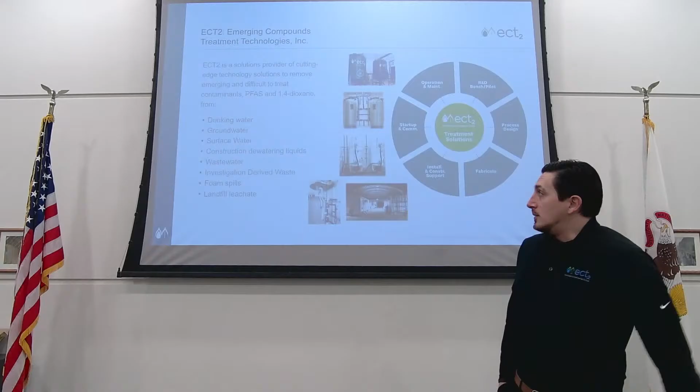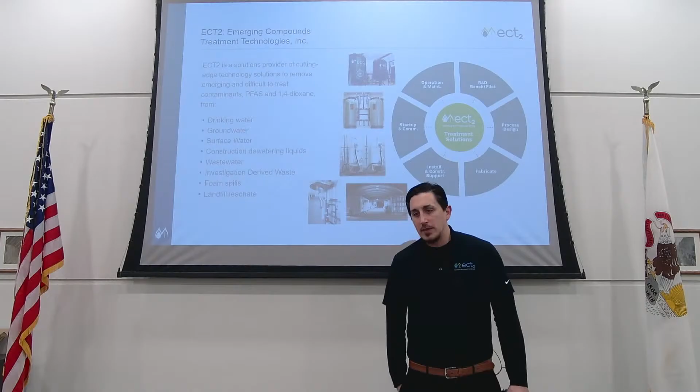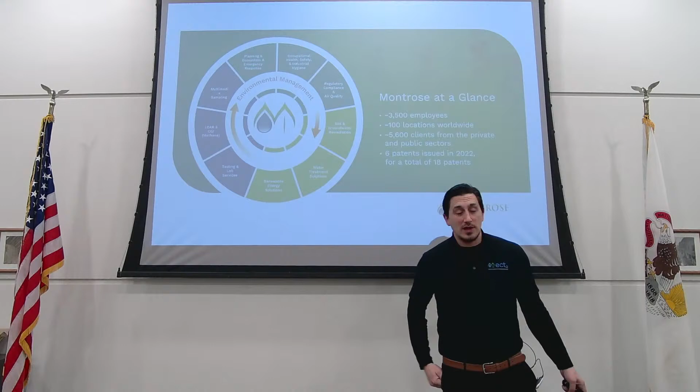A bit further on about us, we are also owned by Montrose Environmental Group. They own 86 verticals of different environmental-based companies, air, water, and soil. We're certainly the water component of that, and specifically, 95% of each day we're working on PFAS. Other verticals include Enthalpy Analytical. I mention that because turnaround times on PFAS analytical is getting longer, right? So this gives us an opportunity to work directly with colleagues. We get preferred pricing in 2 to 3 week turnaround times. So as we're developing projects, doing bench tests, evaluating technologies, we can get to the end quicker with data at a rapid rate.

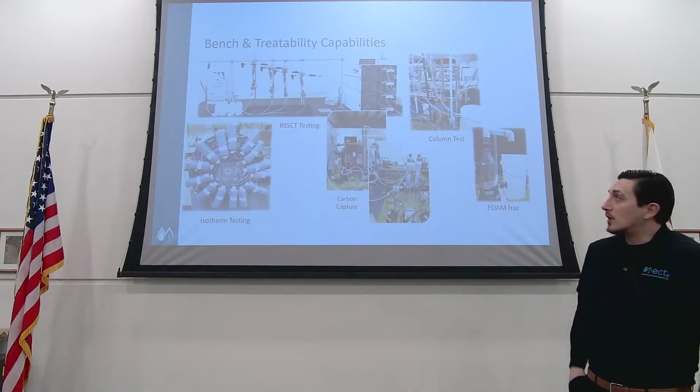So leaning into that, in Fuquay, North Carolina, we have a treatability lab where, you know, it might be a conversation of, is it GAC, is it ion exchange? Well, let's figure it out from the least cost intensive perspective first, and that would be a number of different ways we can analyze this just on the bench at our lab. Our RSSCT testing is rapid small scale column testing. So what we do is we crush these ion exchange beads and we get breakthroughs in days as opposed to months or even years.

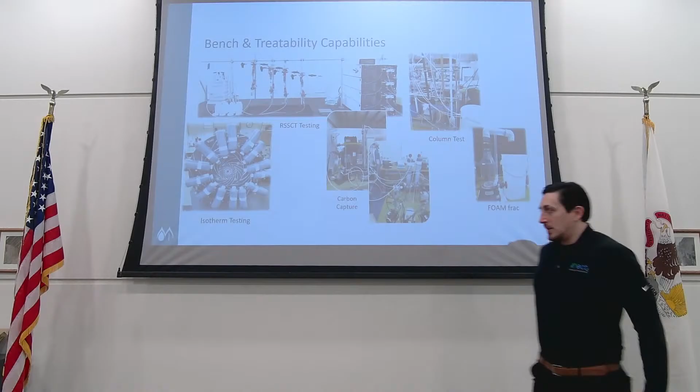With PFAS being minimal, if we're trying to get to 4 parts per trillion and we're at 8, it might take a few years to run columns and get breakthrough. This helps us expedite that process, beginning with the end in mind. Isotherm is basically a yes-no test: will the media work? If so, then we can proceed.

All this we kind of create stepwise just to give you an idea of what it looks like to really analyze this. Next phase, taking it from the bench to the pilot. Certain cities are going to want to see the demonstration of the technology at their site with their real-time water. It's great to get a grab sample, send it, test it, get some numbers, but to make it more real, this is our next phase.

Column tests up there would be a couple different carbons, couple different resins, the ability to take an honest look at if it works, which one might work better. All the way down to mobilized systems here in 40-foot containers that can run 365 anywhere in the world.

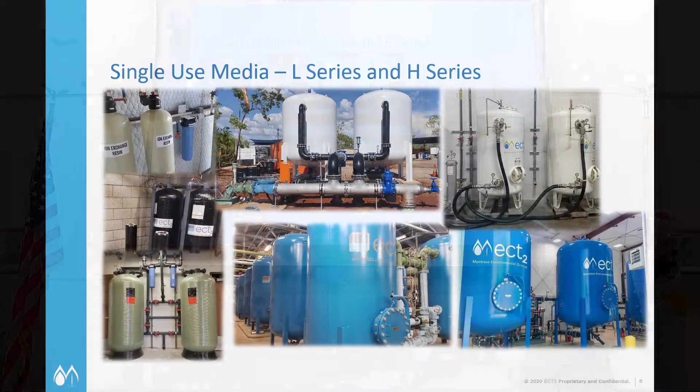Then just a quicker look here. We've got a couple different sizes basically, running from under-your-sink cartridges to 8 GPM. For all intents and purposes, you're looking at softening vessels there, 8-inch diameter, 54-inch height. These are all going to go up all the way to what you're seeing here, our 12-foot diameter pressurized steel vessels rated for 125.

We've got newer versions that are shorter, and I'm going to get into the reason why that is, but carbon, resin, pressure vessel flow through. We're designing it with specific contact times specific to the media, and I'll touch on that a bit more as well.

Rapid response equipment, if you've got a spill as mentioned, or a groundwater site we need to treat, we can certainly deploy these independent skids. It just makes it a lot easier to set up a system without building a building around it. This helps us get to work really quickly.

So just a quick outline, I'm going to touch on a couple different treatment technologies here, and from a few different application points. Whereas PFAS, it's everywhere, so how do we get it out of drinking water? How do we get it out of these passive receiving waters, out of their effluents? We're going to get into that.

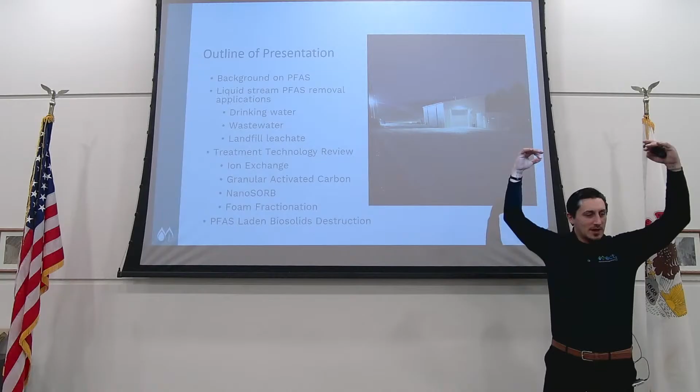Cool, quick story. That was all you see is dirt. To the left is Champ Landfill in Maryland Heights, and it's actually an old quarry, so it's the opposite, where it's not a hill building up this way, they're bringing all their trash down into this quarry, and it's a Waste Connections site. We're very fortunate to be treating their leachate for PFAS. So this building we built from the ground up, put a PFAS treatment system in and built around it. I took that earlier this week.

No snow there. So I didn't want to assume we all knew everything about PFAS, so I'm just going to touch on it briefly.

Why? Because in large part they exist more places than not. We made the most of those two, we use the most of those two. So by nature it persists, and as a result we see a lot of it. So I think we all know most of this.

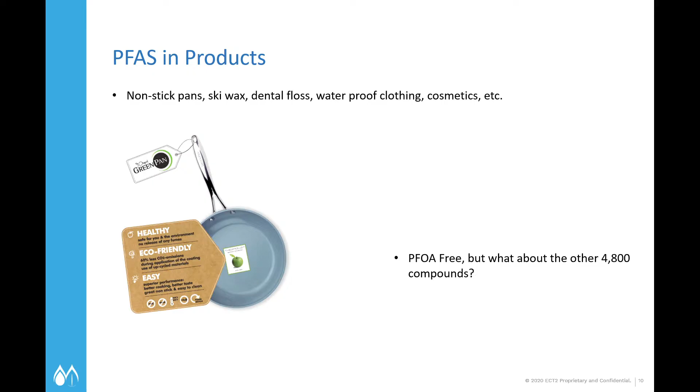I'm not going to beat us on it, but where does it come from? Scotchgard, Teflon, anything that's making - even probably this shirt being like Gore-Tex has probably got some PFAS in it. Cosmetics, packaging from fast food - it's everywhere. Carpet. So as a result, it ends up everywhere. A lot of it, as mentioned, ends up in the passive receivers, the landfills, and the wastewater treatment plants, just as a direct result of it being in convenient products.

So just a really quick touch on the chemistry. I've mentioned this, but it's important to understand why. The hydrophobic tail absorbs into things extremely well. That hydrophilic head, right, the bottom, this part here, that's a carboxylic acid group. The top is a sulfonate group. I mention this because those heads have a charge to them, so they're negatively charged. We take advantage of that charge on that molecule no matter what technology we're utilizing.

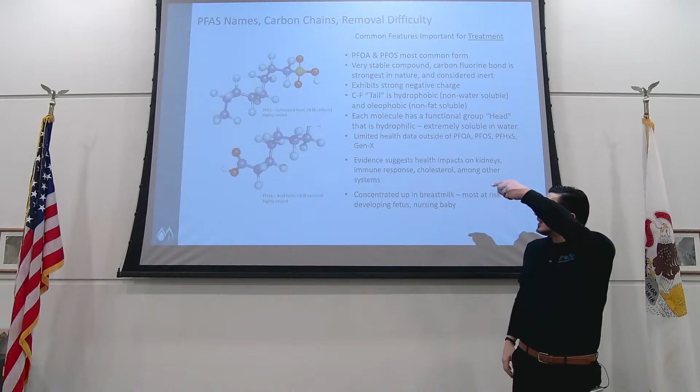So this one here, sulfonates, a bit easier to remove, but that's what you're seeing in AFFF, PFOS. PFOA is a direct result in your Teflon. So if you look at the Ohio River Valley, all the water there, we've probably seen dark waters. I would recommend it if you haven't, but that's Teflon. So it's really specific to certain areas.

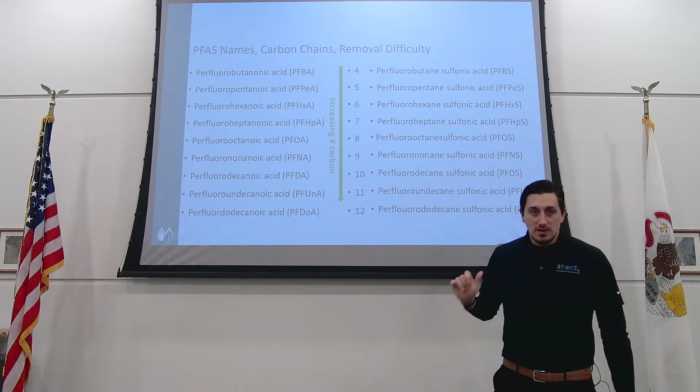So PFBA is a big one you're going to hear about. Right here in Cordova, Illinois, 3M is manufacturing it, utilizing it every single day. And the result of that is their groundwater is contaminated and their stormwater is contaminated as well. So I'm happy to say that ECT2 has the largest treatment system in the world in Cordova, along with a few others, Cottage Grove and Decatur, Alabama. We're doing a very good thing there with a great effort by that company. That's removing all of these high concentrations from 3 different flows, combining them, and then treating that PFAS to a non-detectable level. So when we're targeting PFBA, it's a real challenge. And I'm excited to show you what technology we're using to get there.

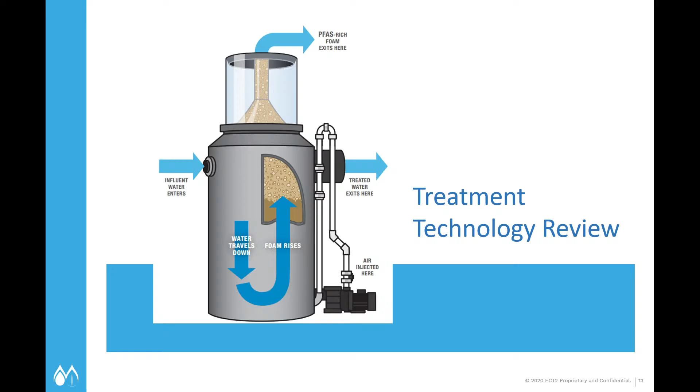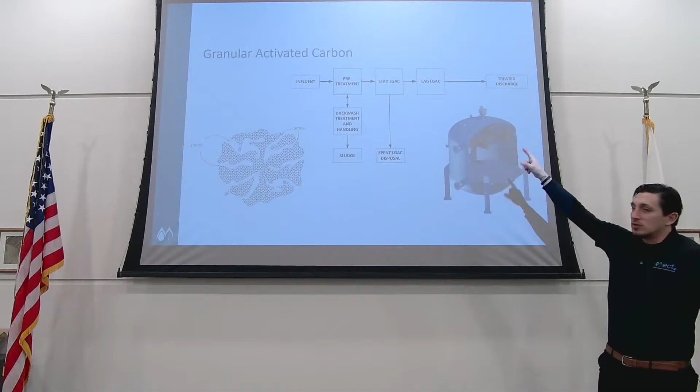You're looking at a pretty standard flow through diagram here, lead lag design with pressure vessels. Some points about carbon that I'll make: it typically, for drinking water, we're looking at 10 to 20 minutes contact time through your vessels. That in comparison to the next technology, you're going to see more vessels, more media. Some of its positives are its ability to remove co-contaminants all at once.

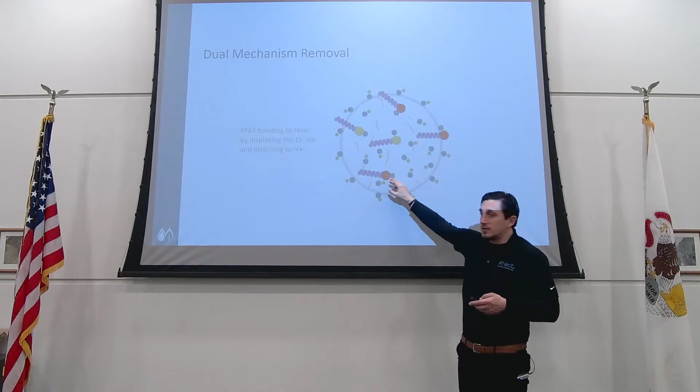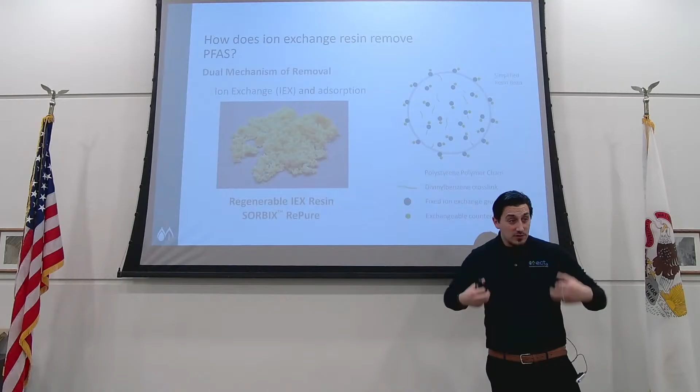You know, I used to think water came through and would flow around it and attach to it, but there's all these cross sites that the PFAS want to attach to because of that ability to exchange ions. So it's going to kick off chloride on this exchange site and attach that negatively charged group head of the PFAS onto the ion exchange. Now the difference here is you're going to have the ability to essentially hold this. It's like a chelation, so it's like a pincer. It wants to grab it like a lock and key. Once it's in, it takes extreme oxidative conditions, temperatures to get the PFAS to come off of the resin. That's a win. Now we've separated it and concentrated it onto a solids media. For most, that's good enough.

So I've touched on this. Here's your PFOS, that's your sulfonic group head. It's on the resin. We've done a great thing there.

The next phase, as I mentioned in Cordova, was more of a call to action: we need to put a patent around something that didn't exist before, which was the ability to regenerate those beads.

Up until this point, we've been talking about single-use medias. Use GAC, once it's exhausted, take it out, dispose of it via landfill, incineration, or other methods. Bring new GAC in, run it to exhaustion, repeat the cycle.

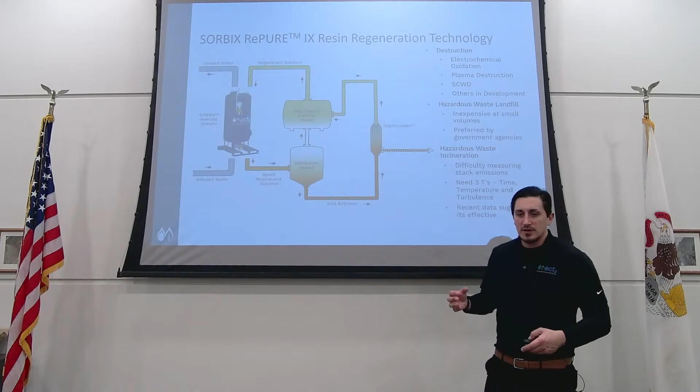It's really the same with single-use ion exchange. The positives to using resin are, now you're down to 2 minutes contact time for drinking water, so we've significantly decreased the need for capital equipment and media bed depths. We've got less media, less equipment, 4 times more removal in terms of total throughput, and more effective removal.

Again, that's the concept of selectivity. These functional groups want PFBS, want these shorter chains. Carbon has the ability to grab things in the order in which they exist, and typically, in large part, the sizes of the compounds surrounding it.

So hitting it with regenerable media, very simple process flow diagram: influent water coming in, counterflow through the bottom, treated water out. We're going to run these vessels basically as single-use ion exchange for 99% of their lives. Upon exhaustion...

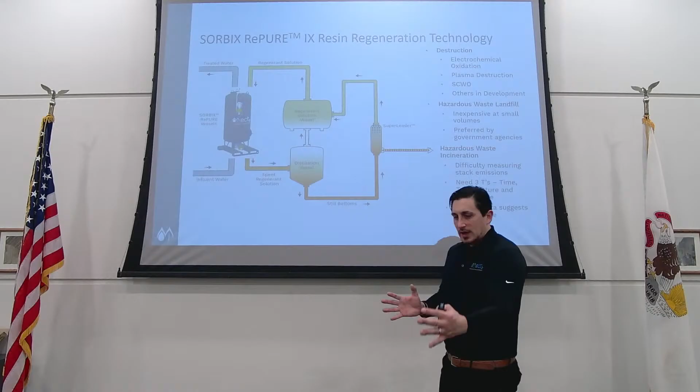There's two approaches we can take here. In the case of the mentioned site in Cordova, because it's upwards of 10,000 gallons per minute, the economics drove us to put a regeneration facility on site. It's a bolted-on building, separate from all the other equipment, and there, because of the levels, we're regenerating weekly. In the instance of drinking water, with low concentrations, we're not regenerating but every couple of years.

That's an instance where I would offer regeneration as a service. You buy all your equipment and all your media. Once it's exhausted, I'll come in, take out the media, bring it to a centralized regeneration facility that's owned and operated by us. We'll regenerate your media and return it.

All drinking water approved, certainly good for treating industrial waters, wastewaters, etc. So here we look for high volumes typically, or really high concentrations of PFAS, and the economics really start to drive favoring this technology.

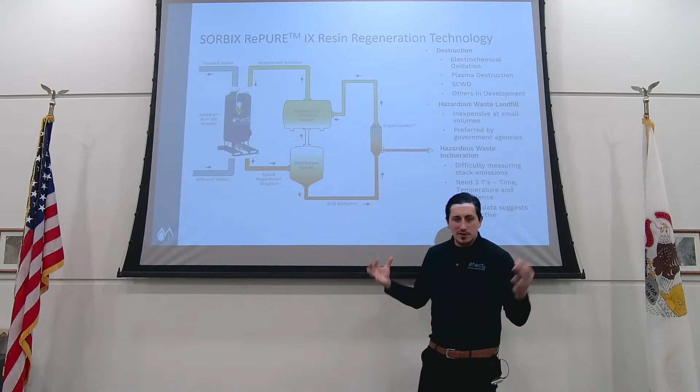You're going to ask, so I'll answer it: what happens when you regenerate it? What about the reject volume? The regeneration process is a two-step process. The first is a solvent-based chemistry that strips the PFAS and any other contaminants off of the resin.

So step one. Step two is adding sodium chloride brine concentration back onto the resin. What that's going to do is take the Cl part of the brine and put it right back onto those empty functional sites on that resin bead, and we can play that over and over again.

These resin beads are robust. They're divinylbenzene polystyrene, macroporous, made to be used over and over again. The equivalent prior existence that still happens in a lot of these resins is they're used as condensate polishers at power plants—condensate polishing resin is almost like a filter, taking all sorts of impact.

So my point is, in the mentioned 2018 site, we've regenerated there over 300 times, still getting 97% capacity back on the bead. So we can continue to use this thing over and over and over again.

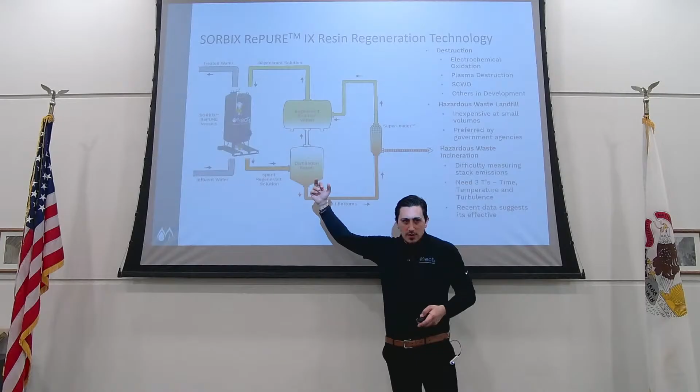So after we've got our media set, we've still got a waste stream to deal with. Distillation is going to recover the solvent, so we're reusing that solvent-based chemistry over and over again, really keeping that cost low. Now we've got still bottoms—that's high TDS, a bunch of salt, a bunch of PFAS in here. What am I going to do with that?

Two options. One we call super loading. Picture 39 trains in series of ion exchange vessels to handle 10,000 GPM. It's a lot, but what we're left with is a one-million-to-one concentration factor on a small volume of very high concentrated PFAS that we load up onto two 3-foot diameter vessels as a single-use approach.

So at the end of this, we've got a much smaller solids management of roughly 54 cubic feet that we'd be changing out on an event of a regeneration.

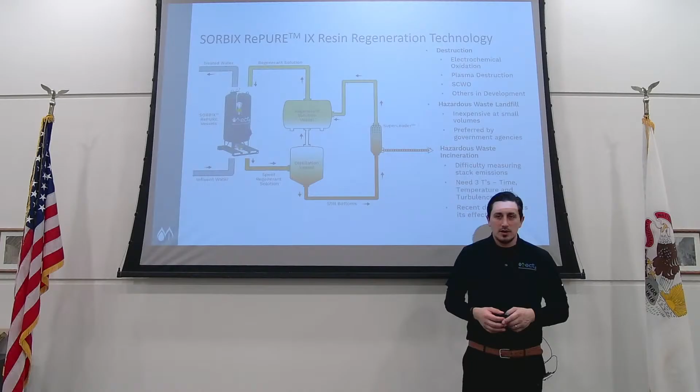So we've touched on this, just a quick overview of each carbon single-use regenerable media. The real driver here is it's typically the lowest cost of ownership, and what we're going to do is put it against a life cycle analysis to say, here's what it costs to buy it, and here's what it costs to own it for 30 years. That's going to give us the most true assessment.

And then from there, leading into what Dean touched on, foam fractionation. This is kind of flipping it on the inverse. We look at foam frac, and I think it's important to mention here and now that a lot of companies exist that just do foam frac.

A lot of competitors just do carbon, a lot of them just do ion exchange resin. They're all doing very great things. But what that does is make me fit a square peg in a round hole with the technology that I have, that you came to me and asked for help with.

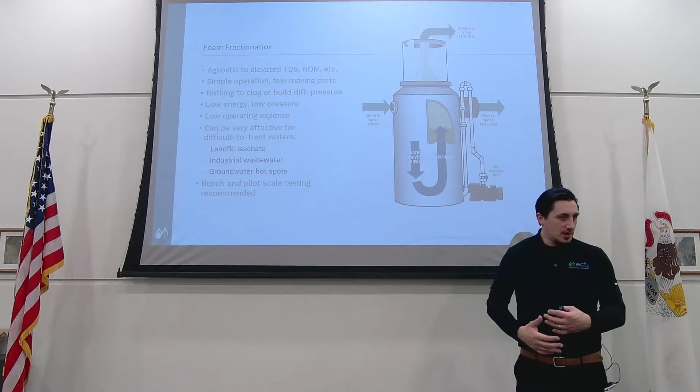If I'm only selling foam fractionation and you need it for drinking water, I'm happy to say that's typically not the best technology to deploy. We've got other things we can look at that will make more economical sense for the end user.

But when it does work, it is really cool, and it's just really taking advantage of physiochemistry with a big fractionator vessel. This thing's like 8 by 15.

We bring in landfill leachate, for example, high co-contaminants. So it's not going to do well in resin because of all the other stuff in it. If you've seen leachate, it looks like melted black licorice.

It's pretty intense stuff. Depending on the landfill, it may be 8,000 gallons a day. Some of the bigger ones, 300,000 gallons of leachate a day.

What's happening is a passive receiver will take their leachate, either force main it to a treatment plant, or we're pumping and hauling to a treatment plant.

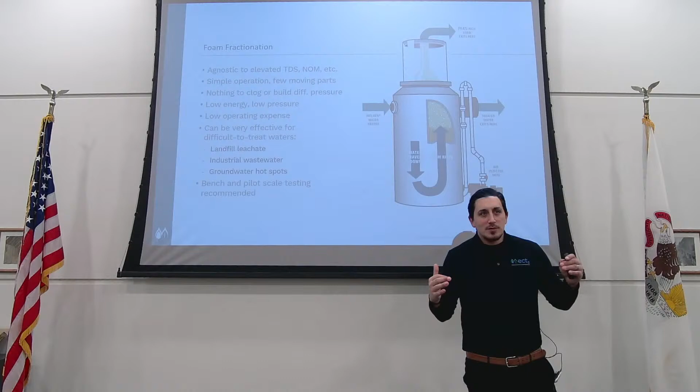That's creating an issue because the solution to pollution is not dilution anymore, due to parts per trillion values and the ability to detect this stuff almost no matter what. Like one grain of sand in the Empire State Building, that's a part per trillion.

We're trying to pull that out of water. This is a great pre-treatment step to take it from one passive receiver to another. We're able to pull it out with very low energy, very low chemical consumption.

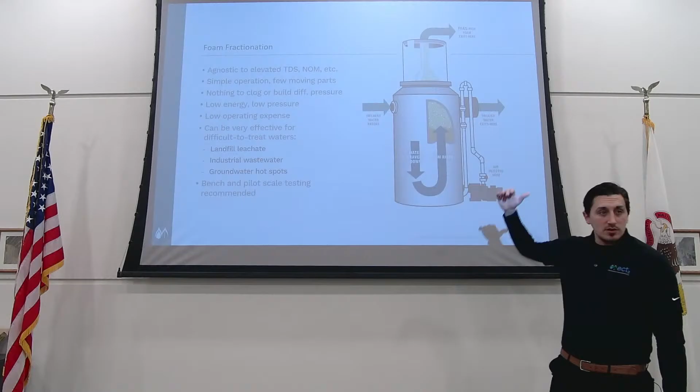Let's call it, in most instances, 80 to 90% of the PFAS. Longer chains, as I'd alluded to earlier, are easier to remove. That stays the same with foam fractionation. The obvious, right? Longer chain, hit it with air, it's going to want to foam.

I'd mentioned AFFF foam for firefighting has PFOS in it, because by nature it wants to be a foam. So we take advantage of that by just hitting it with air and recirculation.

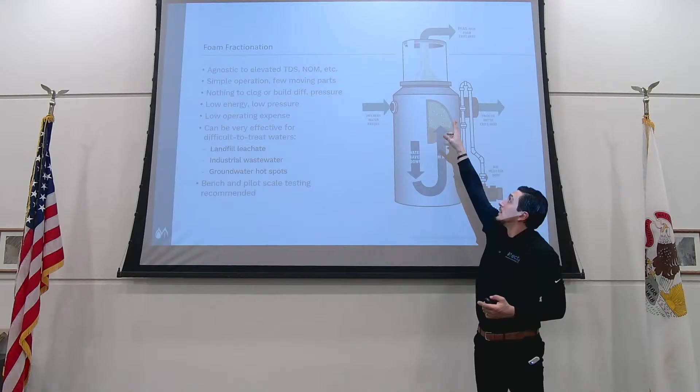So the leachate's coming in from the landfill, a pit or an EQ tank, dropping down, and we're just recirculating this over and over again, and a foam column is created that goes up the center of this fractionator to this column here. So now all of your PFAS is in the foam.

And 99+% of what you treated, your effluent, goes off, and I'm going to show some data on that. So how do we get there?

Same deal, let's start on the bench. You send me some water, this one was 750 gallons. We're down to, if you send me a tote of water, I can analyze it for 15,000 bucks and tell you what the end looks like. So we'll do that in-house.

Next step, we're going to do a pilot on site if you want to. Those benches, we've gotten really good at being repeatable, where we'll get into a performance guarantee based just on data from a bench analysis.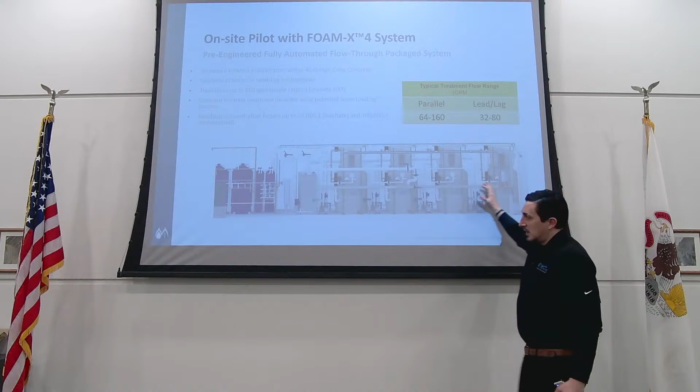What we're really trying to do here is take advantage of comparative HRT, retention times. So I'm basically simulating the environment, getting 11 minutes each, where I'd want to replicate that in my larger vessel that I'd shown, getting about 40 minutes in there. That 40 minutes of recirculation time creates a good, consistent dry foam by volume.

This pilot is something we can trailer in, drop on the ground, run for 2-3 weeks, optimize the testing, and know what we need to do for full scale.

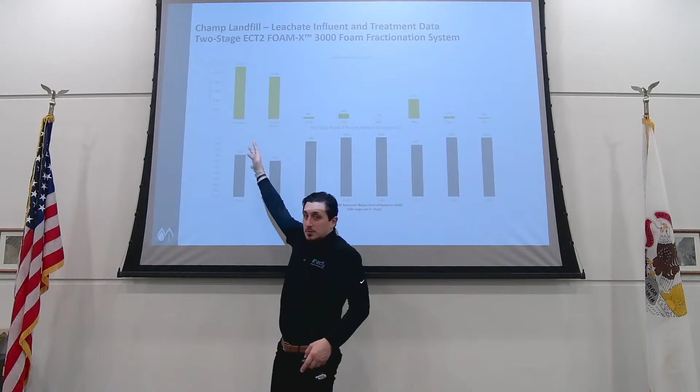This is really exciting data, kind of hard to see, but I want to point out a couple numbers here. This is your total PFAS coming in, about 11,000 parts per trillion. But the big thing here is that 9,000 parts per trillion of that were some of those shorter chain compounds.

What's happening is, if we're just looking for PFOA and PFOS, these things degrade over time in the landfill and turn into shorter chains. So it's almost like short chain soup, and you think everything's moving in the right direction, but the total mass of PFAS remains the same. Still the same volume of PFAS, it just looks different.

What I'm getting at is, we decided here that we were going to remove 70% total mass.

In order to do that, we needed to figure out how to pull out some of those shorter chains, which is not easy to do with just physiochemistry. So what that looked like is utilization of different surfactant additions, and we're talking like milliliters per minute, dripping in.

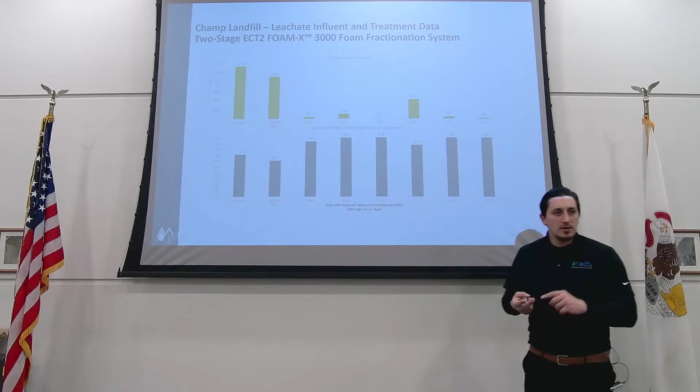Now the addition of these surfactants creates further separation and selectivity for things specifically like PFBS. So you took PFOS, it degraded over time, it turned into PFBS. There's a ton of it, and we got to get rid of it. That surfactant helped us get 87% out, and that helped us reach the target of 70%.

So now you're seeing, if 4 PPT is my goal on drinking water, I'm probably not getting there, right? So, great technology to pull out a bulk of the total mass, so that we're not just dealing with it another different way.

This is the mentioned Champ landfill. This is the full-scale site. It looks like a lot, but it's really basic. The flow-through diagram up top here, water's coming in, holding tank, runs through one fractionator and then a second. The more fractionation time, the more PFAS we're pulling out. That then goes to this tank right here.

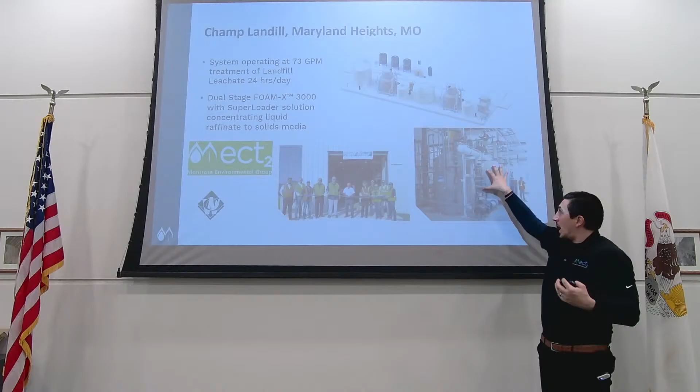It's a holding tank. The foam breaks back down into a liquid, and we test that liquid for the concentration factors. That matters. So really, the better concentration factor we get, the less volume of actual water's ending up right here. So here at Champ, we're getting like 2,000 to 1 concentration factors. Every 2,000 gallons we're treating, we end up with 1 gallon of foamate concentrate as a liquid.

Same deal here as I'd mentioned before, SuperLoader. So that's what we're doing with the concentrate. Now all the PFAS lives here. We're running it through those 3 vessels you can see up top there. They're little 3-foot diameter ion exchange vessels. So now we've loaded a liquid PFAS problem in a large volume into a small volume onto a solids media.

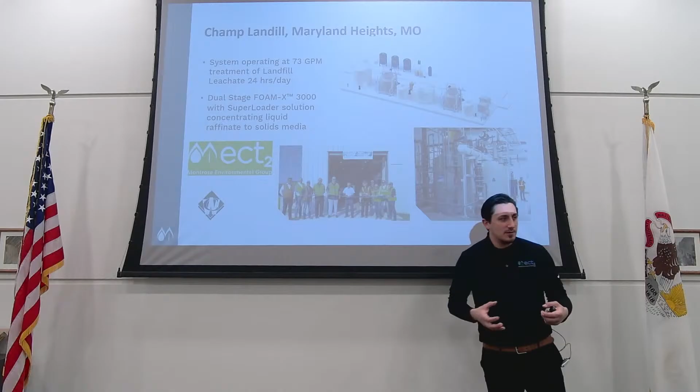At a landfill, with the data that we have, the ion exchange not only doesn't leach off PFAS, it typically takes up roughly 20% more PFAS. If I were to take it out of that vessel and just loosely put it back in the landfill - not saying that's what we want to do - but if that were to happen, it's not only sequestered, but it's actually taking up PFAS all around it. So there's still some throughput capable, and it's not just going to end up where we're just chasing our tail over and over again. That's what that looks like.

Other options are taking those 3 mobile vessels - they're skidded, taking them out - and a bolt-on destruction technology goes right in on that back end. Those destruction technologies, like the things that we created, handle high salts and high concentrations of PFAS in low volumes. So a company like Axine Technologies out of Vancouver, they are using a process called electrochemical oxidation, and that basically destroys that carbon and fluorine bond, which is the hardest bond to break. It's the most persistent in the environment.

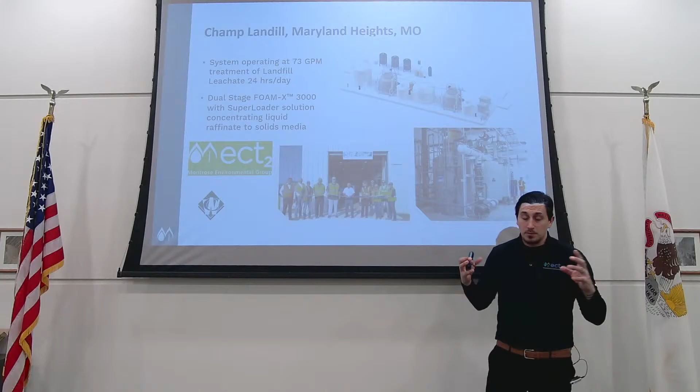So now we've separated and concentrated with the ability to do destruction on that back end. Other methods, while we're talking about it, of disposal for the media, I typically lean on high temperature thermal incineration. There's great reports out - one by a competitor, Clean Harbors, has 7 nines removal on the destruction through incineration. So, 99.99999% removal through the air emissions of PFAS. So we're getting more comfortable with the idea that that indeed potentially can break the bond across the board.

Ion exchange is actually almost preferred, and it's really what I'd mentioned before, just the constituents in which it's made up of, right? It's plastic, it's got high BTU values. So an incinerator actually has to meter this stuff in because it gets too hot. So they take it, they prefer it, and we've got good data and good considerations around scrubbers in these cement kilns, like we've been doing for sulfur for 70 years.

So continued path forward, cognizant of what we're doing as opposed to it's good enough for now and we'll fix it again later, right?

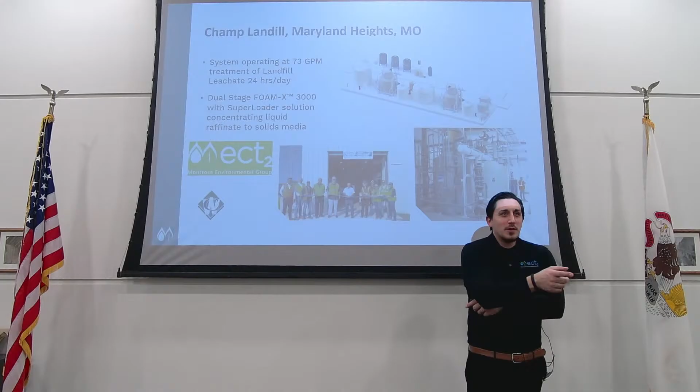You're so right. Exactly. The best way that I think about that is, right now it's in the air and it spreads. We already know it spreads through rainwater. Cape Fear down in Fayetteville - I'm going on a tangent here - but coming out of the Cape Fear watershed, 93 miles away is Chapel Hill.

In Cape Fear, Chemours makes a very specific PFAS. It's called Gen X. That Gen X was the replacement chemistry for PFOA. It's just shorter, so it's less persistent in our body - it's probably a good thing. Either way, it still persists. It's only made there, so it's kind of like a PFAS fingerprint. They found it 93 miles away in Chapel Hill, just in the rainwater. So to your point, through emissions, we can find it in places where people have not been living maybe ever.

So there's a reason to that. And yeah, let's not create another problem, right?

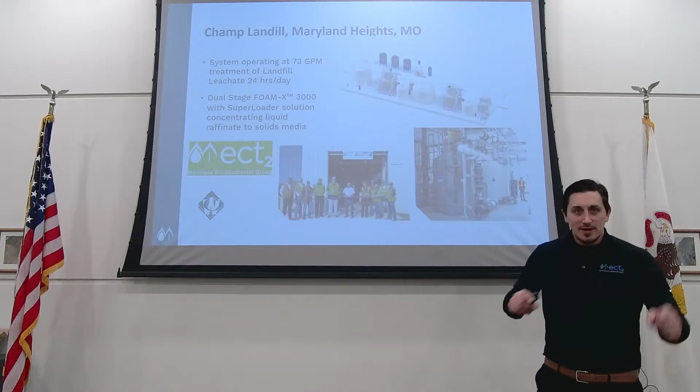So we chose a long time ago to be agnostic to the destruction piece. We're really good at taking it out and really good at concentrating it. The R&D component that goes into destruction is significant. There's a number of really great companies out there, and when we make these concentrates, that's treasure to some of these folks we're working with. We say, here's the concentrate, here's the order and how many times it's been concentrated, here's the chemistry around it. Do your demonstrations on destruction and then share the data. So now we've got really reputable data to say these technologies work great here, lesser here, helping us build a full picture.

Last thing I want to touch on, wastewater treatment plants, right? There's no coincidence we're ending here because everything ends here. The best story I have is TRA Central down in Texas asking me what it looks like to treat our 225 million gallons per day flow with carbon and or resin.

That's great because again we're all trying to figure this out. Some states are ahead of others. I'm happy to have that conversation and show you what it looks like, and what it looks like is 5 Bass Pro Shops of carbon vessels. Significant. Roughly $198 million in pre-treatment, media, and vessels alone. And then the other side of the water's got all sorts of stuff in it, right? Co-contaminants and things that are going to make you need to change that media out pretty frequently. In their instance, it was almost monthly.

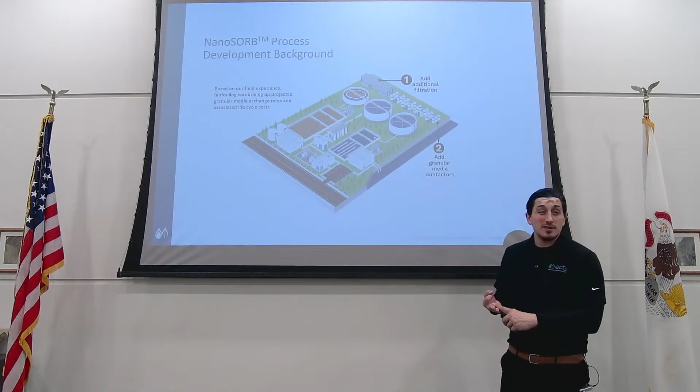So what we're looking at here is the added scope to treat PFAS at your existing treatment plant. You're probably going to need some version of RO, nano, or ultrafiltration ahead of your GAC vessels. In that case of 225 million gallons, it was 98 pressurized 12-foot diameter systems, and as mentioned, almost $200 million. So what can we do?

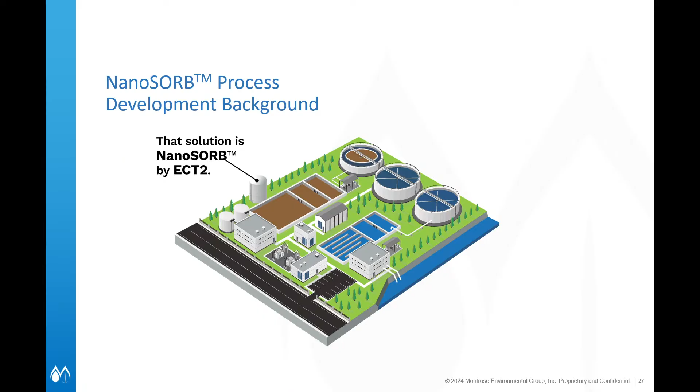We cannot do that. NanoSORB is a way to take advantage of the process you already have in place. So we're retrofitting into an existing MBR, taking advantage, or an aeration ditch, or an SBR, or an MBBR. What I'm doing here is adding a silo, a hopper, and a media. It's a dry powder. I'm dropping it down, making it into a slurry, and injecting it in line into your aeration basin, for example. Now, I'd mentioned before with fractionation, HRT - here I'm taking advantage of SRT. So just the very basic dumbed-down version: I'm injecting it in line, and instead of your contactor vessels at maybe 20 minutes, now we're looking at 3,000 minutes plus, taking advantage there.

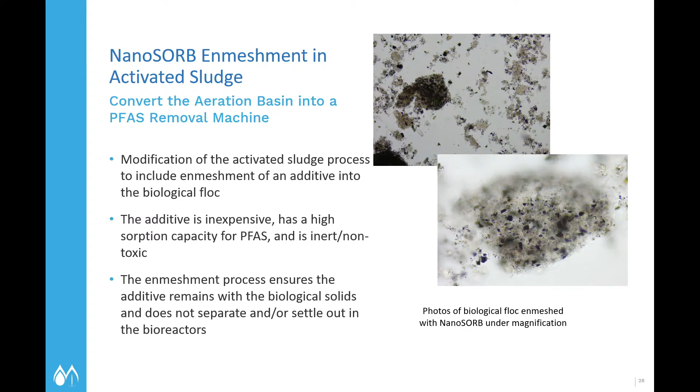So what is this NanoSORB doing? It's essentially an enmeshment of PFAS into the biological floc. My best example is an SBR in Michigan - it's a landfill, they've got a PFAS problem. The treatment plant gave them an IPP to remove PFAS. We evaluated all the technologies, and adding NanoSORB into their SBR and removing it in the sludge was far and away the most economical and most efficient.

Great question - it's a landfill in this instance, so we're putting it back at the hill, keeping it there. But it's got the PFAS in it - you nailed it, exactly. Now it enmeshes this, and same as I mentioned about the ion exchange, 55% uptake of PFAS if we were just to throw these biosolids with PFAS right back in the hill. So same deal, it's got adsorptive and uptake properties.

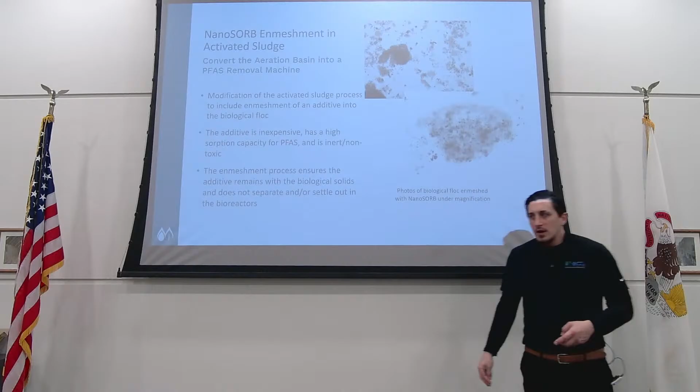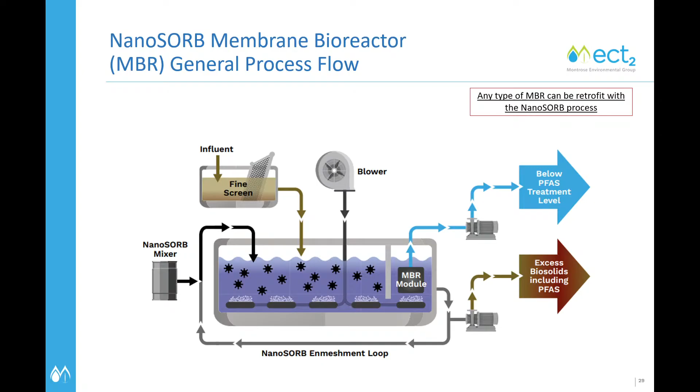But this is the path, and what we see is it's not only not toxic, it's inert. There's no effects on, we've done testing on various membranes to assure the effectiveness, it's not having some counter issue to it. So it's very inexpensive. It's a consumable. Once it's in, you're using it till it's gone, and you reuse it over and over again. The beauty we see is when we test the effluent, there's no nanosorb left in the effluent. So that's telling me it's grabbing PFAS and all these other things. That's the really fun part.

For a 1 MGD facility, here's your value prop. What is it going to cost to put in GAC at a 1 MGD facility? $4 million bucks. But the real number of concern here is your operating cost using GAC on your changeouts—$18 million over the course of a year. Nanosorb install is less than $2 million, and your consumption over and over again is repeatable, and it is significantly less.

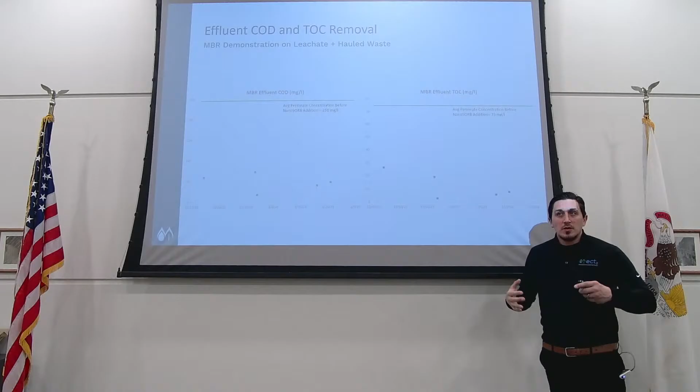The other ancillary benefits—this is all, mind you, while we were targeting PFAS, we wanted to do our due diligence and see what else it did. It did a great job pulling out COD. It does a great job pulling out TOC. In the instance of the mentioned landfill I'm working with in Michigan, it was almost a Trojan horse approach where their first issue was color. They get seasonal swings of TOC, humic fulvic acids, giving them a significant color tinge in their effluent. That was an issue for the treatment plant. So we looked at the testing, analyzed it against TOC removal, figured out it was pulling out 90+% TOC, directly reducing that color impact.

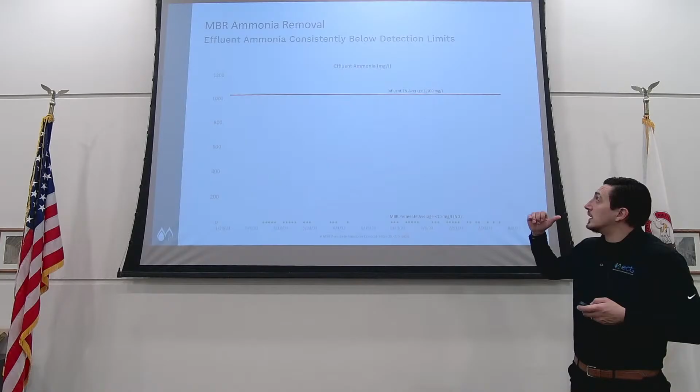And then, oh yeah, by the way, it also pulled out 99% of your PFAS. You guys good with that? Great. So doing a good job on TOC. The other really great data point is 1,100 ppm ammonia existed in one of the landfills we looked at. We got it to less than 1.

And this again was targeting PFAS. So we understand there's more issues than PFAS, but also I'm not trying to muddy the waters and extend the scope unless I absolutely have to. Here I can do both of those things all in one—ammonia, TOC, COD, and then, of course, PFAS.

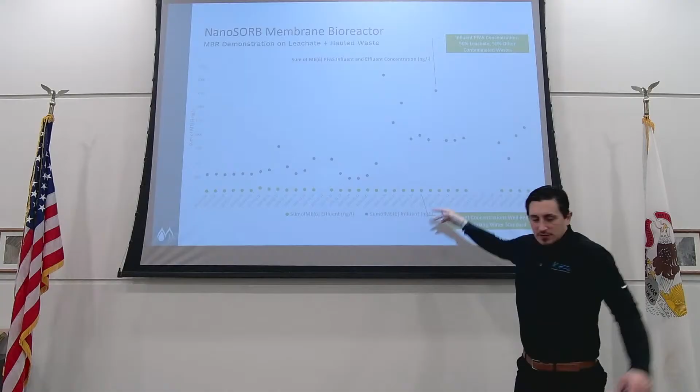So what we're looking at here is a wastewater treatment plant, Anson-Madison, Maine Sanitary District. They take about 5 different landfill leachates. It's a considerable volume per day in addition to a couple million gallons of flow. The blue dots are all influent PFAS concentrations—this is when they started bringing in the leachate. The green dots are all PFAS removal, the sum of the main 6 PFAS. The state of Maine is specifically concerned with 6 constituents. They add them up, and the sum of those 6, we're at essentially non-detect on PFAS removal across the board.

So this is happening right now, actively, every day in Maine. And the real beauty here is the symbiotic win of saying, I have a municipally owned landfill and I own my treatment plant—somebody's got to do something. What does it look like? How do we do it?

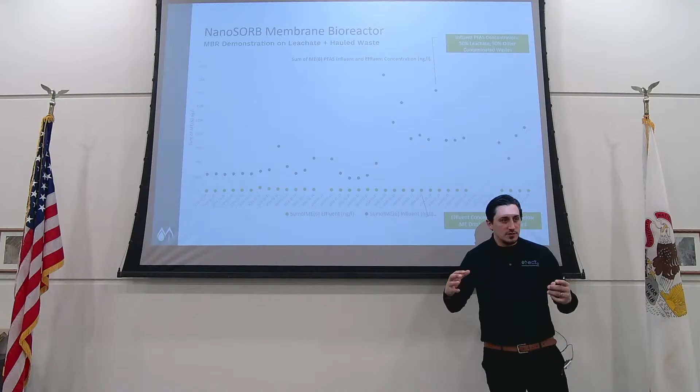In some instances, it's treating at that point source where the landfill is contributing 95+% of the PFAS. Other times, in the case of Anson-Madison, they've got a semiconductor facility, metal platers, so a lot of that total mass is coming from a significant number of sources. Point being, it made more sense to treat at the treatment plant in this instance, and this is what that looks like.

And then, specific to the PFAS we'd alluded to, same deal—longer chains, easier to get rid of.

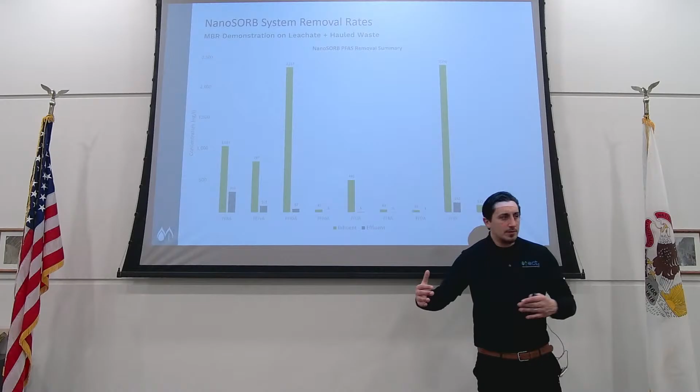Last thing, and I don't have a slide for it, I apologize, but let's flip it upside down. We don't want to impact the biosolids. Now I'm at a treatment plant, I'll use one in Michigan, 1 MGD. We're taking the WAS centrate line, which is 73 gallons per minute. We're creating a side stream where you get a skid mounted system, a very similar process where we're retrofitting into that side stream, dosing a chemical, injecting it, taking advantage of retention time, making a solids, and then returning the centrate line. What we've done here is created a small amount of biosolids, 1-2%, which is extremely loaded up with PFAS.

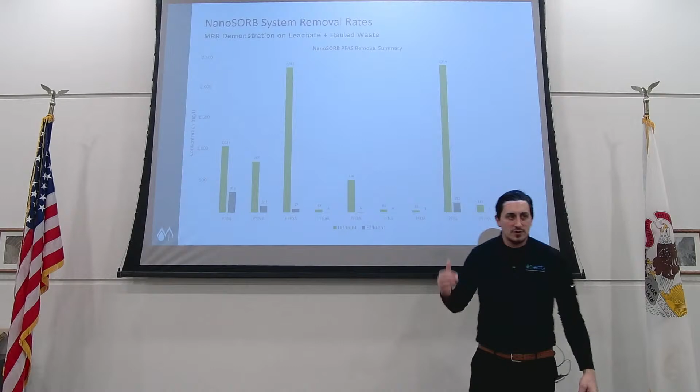Now 98+% of our biosolids are going to meet those targets. In Michigan, they were at 18 ppb. If they hit 20, they now have to spread on twice as much land as before—a significant cost increase. We took them from 18 down to less than 5 with our first order of testing.

So now they can comfortably continue to land apply in the state with a very minimally invasive retrofit into the system. Just round order, less than $250,000 a year to do this for a 2 MGD, as opposed to tens of millions to continue to land apply. So all that said, we really want to dovetail and engineer and cater whatever treatment looks like for your system specifically.

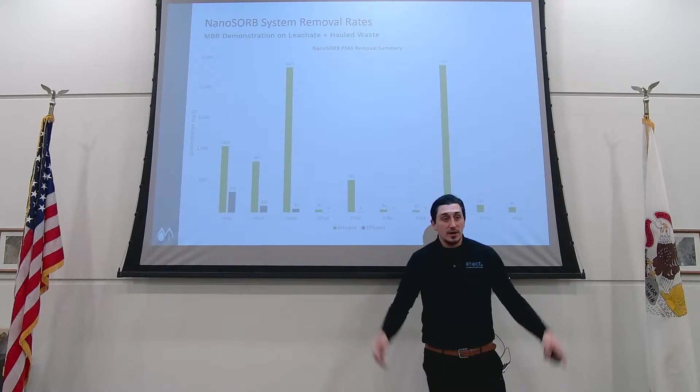Yeah, thank you, for sure. Anybody questions or thoughts? When it becomes an issue, let me know, happy to help out. Any other questions, general, along the way? I got my card up here. So Brandy, you might know a little bit more about this. You might be able to.

Okay, all right, morning everybody. Hopefully you got everybody in here. My name is Kevin Padera. I work for a company called Enecon Corporation. For those who don't know who we are and what we do, we're a manufacturer of 34 different unique polymer composite coatings, all designed to repair, not replace, building structures, equipment. It could be concrete, pumps, tanks, floors. A lot of different applications.

So today, specifically, what I want to present to you guys is maximizing uptime and pump efficiency utilizing advanced polymer composites. So here's a study.

Project overview: there was a county out in New York called Monroe County, and they wanted to do a study on all different pumps. This is on the potable water side. They wanted to determine, we're sandblasting these pumps, these components, these impellers, these volutes, but are they getting efficiency gains? The answer was not really.

What happens is you blast it, you're going to be at a certain peak, and I'm going to show some charts on it. As soon as that pump runs over, let's say 30 days, 60 days, a year, it really drops back down to where it was previously. So they wanted to determine if we were to use coating, epoxy coatings on the inside, not so much on the impellers, but more on the volutes and the horizontal split case, what would happen.

So we'll talk about the findings, we're going to talk about the results, we're going to talk about the coatings, how they held up over the long term, their recommendations, and of course Q&A. And I'm actually going to show a lot of real life examples after that.

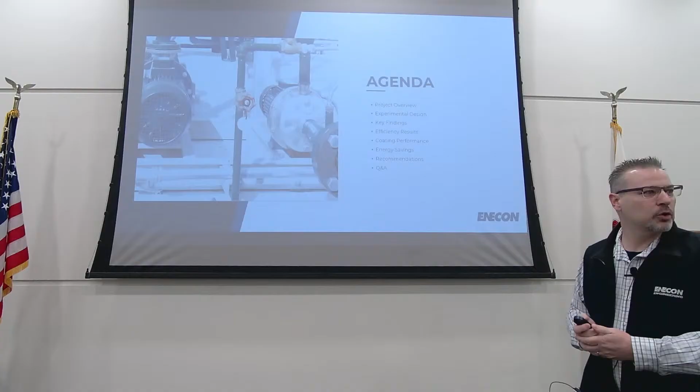So here's the objective, I kind of mentioned this already. They used it on 17 different pumps at different lift stations, different pumping stations. Again, this was done through the New York State Energy Research Development Authority, that's what NYSERDA stands for. And it was done with 30-day intervals, 90 days, 6 months, 5 years, and beyond.

The biggest thing they wanted to determine is, hey, we're paying a lot for running our pumps, right? In every plant, that's one of your greater expenses is your electric bill. What's going to happen over time is you're going to get efficiency gains, you're going to save a lot on that. In addition, there could be rebates offered by utilities that could really help pay for the project, which is all the better.

You're going to get much less drag when you're having a pump that's coated on an impeller, a volute, or a horizontal split.

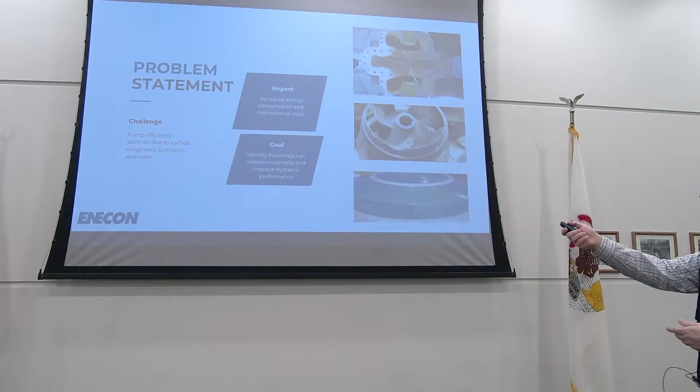So if we want to see, all right, we're getting a lot of our increase on our power bill, how's that affecting our maintenance costs? And then they wanted to see if the coating could reduce surface roughness and improve the hydraulic performance. That's what we're looking to do here.

Hopefully that doesn't look familiar right there, the tuberculation on a pump, not really that great. And of course, you see a lot of this - you'll see erosion and corrosion in a pump volute right there.

Typical application is going to be 2 coats, maybe 6 to 8 mils thick per coat. But the key is, of course, you want to get that proper prep, because if you just sand it down, you might have some issues, especially if you're doing the entire interior of a pump or a volute casing.

So we're an epoxy Novolac manufacturer, but they did powder coat. They wanted to determine which ones were going to work out the best.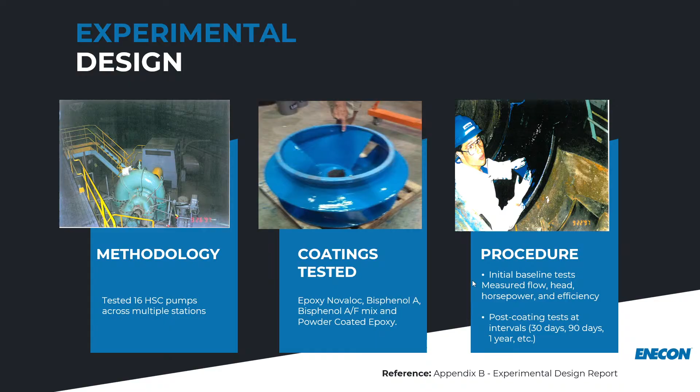So the other thing they wanted to determine is, and you do this post-coating - no cutting or anything, this is tests.

You want to make sure you could monitor your power, right? You want to see what it's going to be before you start the project. You want to see what it is during the project and see if you are actually having tangible savings there, which they did. So these are just really simple ways to do that.

And what we can do is, after we do this test beforehand, after the coating's been applied and you monitor that over a time period, you submit that to the utility and you're going to be eligible for rebates. That's how that's going to work.

So this is a pretty eye-opening slide right here. So this one has a 60 horsepower pump, and this is the initial and over time. So in this case, they just did some mechanical refurbishment, did some seals, did some wear rings, and they wanted to see what that was going to look like with the blasting.

So I'll actually come over here so you can see this. It starts up at 80%, it goes down to 72. Well, we're seeing it on a lot of new pumps - you put these in, and your efficiencies go down to what that manufacturer curve is relatively fast.

So it might be in, and it might go down. Let's say you're at 90%. Pretty fast, you're going to be down to about 80% or so. And after time, you're going to be down to 60% of what that manufacturer's initial curve is.

We can see on this case here, this one pre-restoration, so they didn't do anything to this - you're running at just a little bit over 75% efficiency. Now post-restoration, look, you're coming up to 79. Not that great, but a lot higher than you are here.

But now after 30 days, after 90 days, after 6 months, and after 1 year, you're kind of getting this again because there's no protective coating applied, and you're kind of right back where you started. So in other words, it really didn't give you a lot of good evidence, a lot of good data.

Now, on that same 60 horsepower pump, abrasive blasting coating. So here's an example of one - I'll get into this a little bit later on. But they had to rebuild this utilizing a ceramic paste, that's what you just see up here in that area because it was very worn from erosion. I'll have a before slide.

And then this is after the coating. You're going to get a lot more, less drag on that. You'll get a lot more efficiency.

So you can see on this 60 horsepower pump, initial and over time, abrasive blasting coating pump number 2. So pre-restoration, you're sitting on this one at about 72.5%. The coating was performed, you can see you're up at 82%. 30 days, 90 days, 6 months here, 1 year, 1.5 year. You see it holds up pretty steady on this.

Now you might think that's not a lot when you look at that, but 10% is a lot. It's going to save you quite a bit on the power standpoint. You're going to be drawing a lot less. The fluid's going to be flowing through at a much better rate to what your manufacturer's efficiency was when that pump was new.

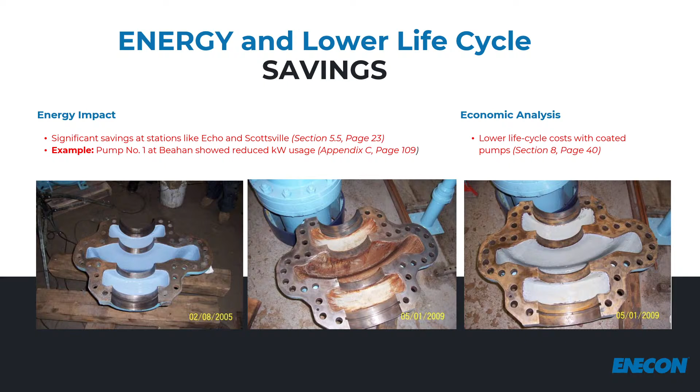This is just rust staining right here. So after they gave that a nice wash, you can see where it is right there. You might have a couple of pockets in there where maybe the corrosion did come through. But what's nice is localized touch-ups could be done and the pump could be put back into service in a relatively fast fashion. So you can see here, it held up really well. And you're going to have a lot better than having leaks, having seal issues, having corrosion. So it really does work out well to protect that split case pump.

So here we go, this is another application I'm showing here that kind of talked about it previously, but you can see here where the erosion had happened. So this is what they call like a doubler plate mesh. You're trying to give it some kind of a backing because you're rebuilding that utilizing ceramic paste. That's what they're doing right here actually. So this is what it's all kind of put in place.

Some pump repair facilities do this, I work with quite a few of them. This is the ceramic paste right here. They're applying that, they can always grind that down once the material sets up. And then they're going to do 2 coats of a ceramic epoxy right there for a wastewater application.

Potable water, you're using generally a chemical protection epoxy, it's going to be a little bit thinner. For a wastewater application, I'd always specify a ceramic epoxy, 2 coats at about 12 mil thick per coat. That's where we sometimes will see that.

It's usually okay on a volute, but when you deal with impeller, you might deal with clearance issues on that. So sometimes we're not going to do those. If we do, it would have to be a lot thinner. And I'm going to get into the study a little bit later on, where we did some testing on impellers as well, just to see what the efficiency was there. And it wasn't as impressive as it was when we do the horizontal or we do the volutes.

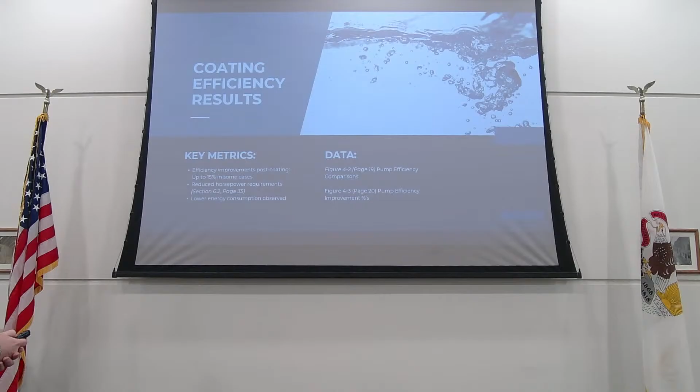So here's the key metrics. The efficiency results of the study, efficiency improvement post-coating was up to 15% in some cases. It all depended, and it also depends on your runtime, right? If you're running 24/7 versus running 4 hours a day, 8 hours a day, whatever it might be.

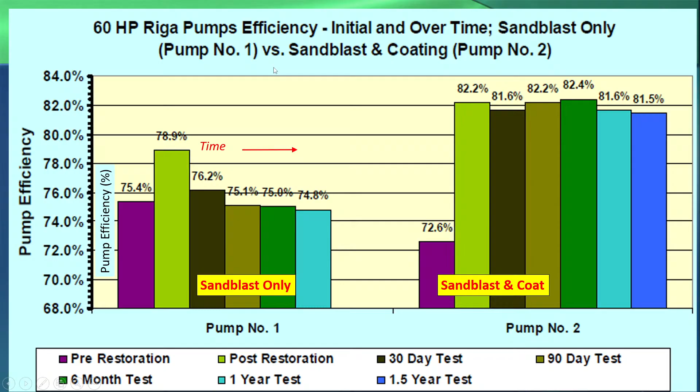This is all measurable, this is all tangible, this is all things you could read yourself. So here's one of the bigger things now. You get that done, there's an initial cost on it. Well, what are you saving on that?

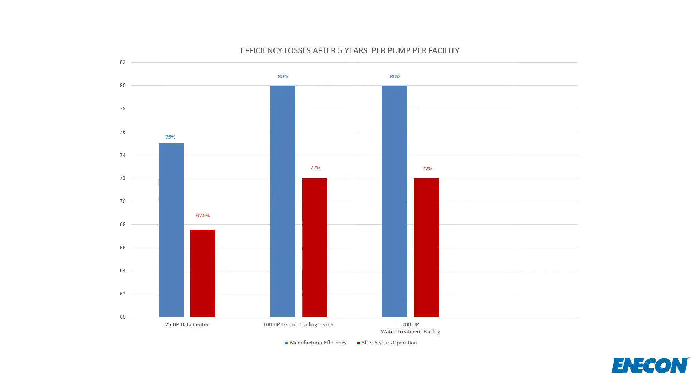Let's go to this one. All right, so the summary of this study was that coatings do significantly improve pump efficiency and reduce energy costs. The impact, potential for substantial savings from having a pump efficiency coating program in place, with additional avenues to have projects completed through readily available utility rebate programs.

So what's the next steps? We have to educate people on the benefits of a pump efficiency coating program and help them navigate through utility rebate programs for maximum cost reductions. And that's going to be a paradigm shift.

I know a lot of people are in charge of writing bids, and you're going after the lowest price. Obviously this is going to be an upcharge, right? You just can't have that for the same price, so it's about shifting that. I know in Monroe County, where the study was done, they do give some rebates to the contractor because they're going to get those rebates from the utility. So they're able to pass that along and can kind of adjust the bidding methods for that. That's what we're trying to do with some of these different utilities out there.

But we're definitely seeing it. The data's there. It definitely saves plants a lot of money on that.

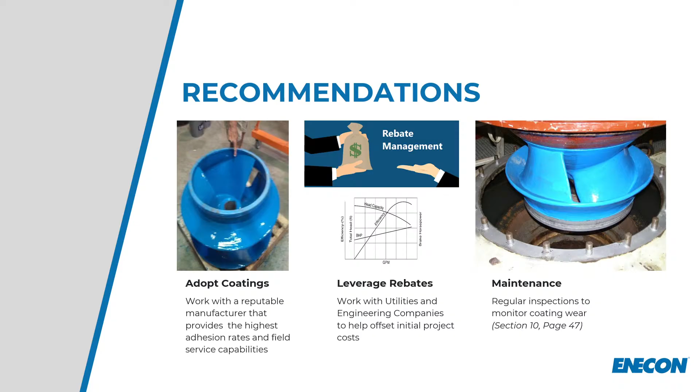So the recommendations from the study from the engineers were: adopt coatings, work with a reputable manufacturer that provides the highest adhesion rates and field service capability. It's very important, obviously. Leverage rebates, work with utilities—which out here is going to be ComEd—and engineering companies to help offset the initial project costs. And then maintenance, regular inspections to monitor coating wear.

Yes, there's going to be some erosion, it could be considered sacrificial, right? So what you want to do is open that up on a maintenance cycle. I see that blue there, and then I might see the gray exposed—oh, that's an area that I might have to do some touch-up work. Or if it's all one color, you're not going to know that until it's down to the original substrate, to the original metal.

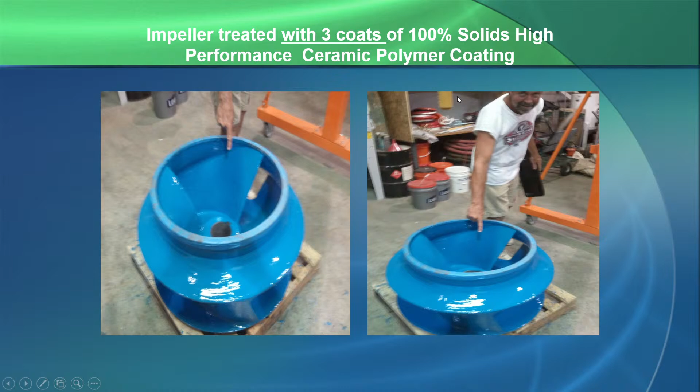So that's why you always want to do different colors on that, just so it simplifies, A, not only the touch-up work, but B, whoever's doing the application can know what they're overcoating. Impellers have a lot of tight spots, corners, and edges. You might miss some spots, so you want to make sure you cover everything.

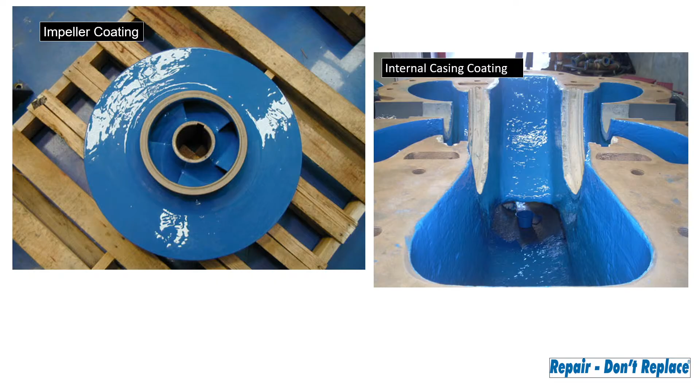Here's just another impeller coating right here, so that was done. Here's an internal casing coating. Sometimes you rebuild those to cut water, so rebuild it with paste.

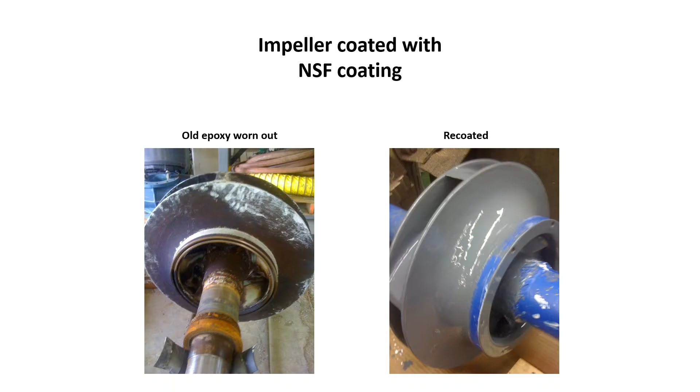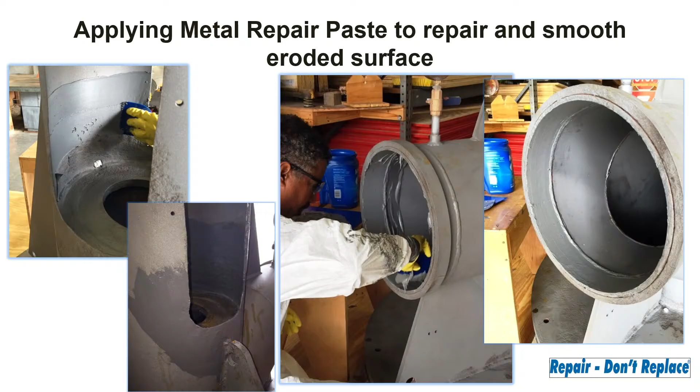So you rebuild the vanes and the blades with epoxy paste - you see the theme I'm going with here. There's the applicator, kind of using his finger to get in there. You try to do whatever you can sometimes.

What's nice too is when I'm looking at any of these products, especially in an industrial environment, I like to look at 100% solid epoxy. What does that mean? That means there's no solvent and no VOC. Very safe to use, not flammable, no respirators needed. It's a lot easier for the guy doing the application. Yeah, you want to try to avoid getting that on your hands - you can get it, I've had plenty of it. It's going to wash off after a week, but you'll be alright.

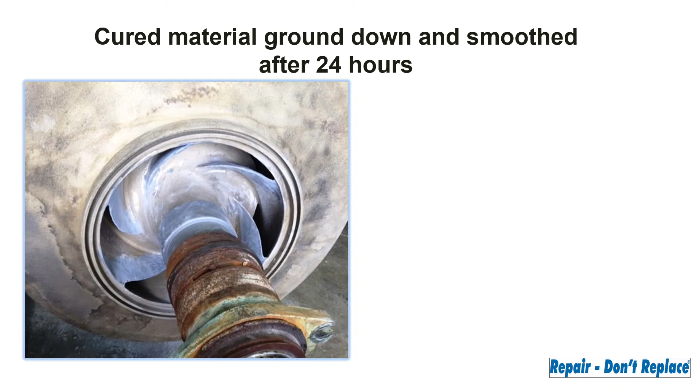So here's the cured material, ground down and smoothed after 24 hours. They let that paste get nice and cured, typically a day, because remember it's a 2-component product. So what happens? You mix it up, it's going to generate some heat, and then it's going to cure out. That's what happens - it gets hot, and then it hardens up. So they let that cure for a day, which is pretty much a full cure at that point. You might not be ready for chemical immersion, but you're good enough to get it sanded down, and then you can coat it after that.

And that just about concludes my presentation. I know I went a little bit short - I could go a lot longer on that. The study, like I said, is 381 pages, but I didn't want to put you guys to sleep. Any questions on anything about?

Yeah, there's different products out there, but I do have one that is approved, though there are other ones too. Wastewater I'll typically do with ceramic because that's going to be a lot better for wear, but that's for the wastewater. You had a question over there.

It's going to hold up very well, depending on the substrate. If you're dealing with stainless steel, I typically wouldn't specify a coating for that because it's just not going to corrode. You're not going to see chemical attack, though you might see some erosion. It's going to last just as long as the original substrate, provided it's not titanium or anything. But typically what I see is cast or carbon steel, and it's going to last just as long as that. Eventually impact might be the biggest issue, but localized touch-ups could be done.

So you've got good adhesion there too, for things like bronze? Yeah, as long as the prep is good.

So yeah, you could test for that. They have something called Testex strips. For example, we do a lot of chiller work, so you get a heat exchanger or a chiller — this is what the Constellation plants do out here — they'll use the ceramic epoxy on that. What they do is use a Testex, almost like Scotch tape, and use a tool to rub on it. You've probably seen that, and then you test it to make sure your mil profile is right. So we test for that, just to make sure we have optimal prep, because if you're not at that 3 mil profile, you're losing adhesion. The worse the prep is, the worse the adhesion is going to be, and the more likelihood there could be a failure. So you just want to make sure you get that optimal prep if you can.